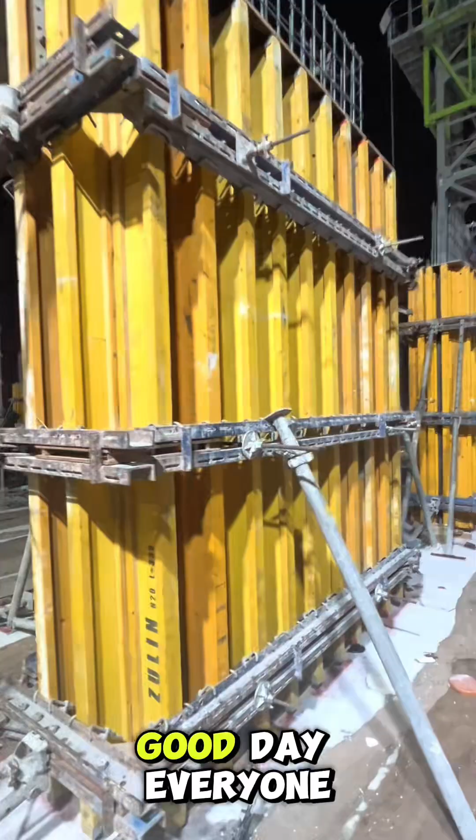If you close your column formwork without checking this, you're risking a major site mistake. Good day everyone, here are the things you need to check as a QAQC inspector or as a site engineer before closing the shuttering or formwork of a column or shear wall.

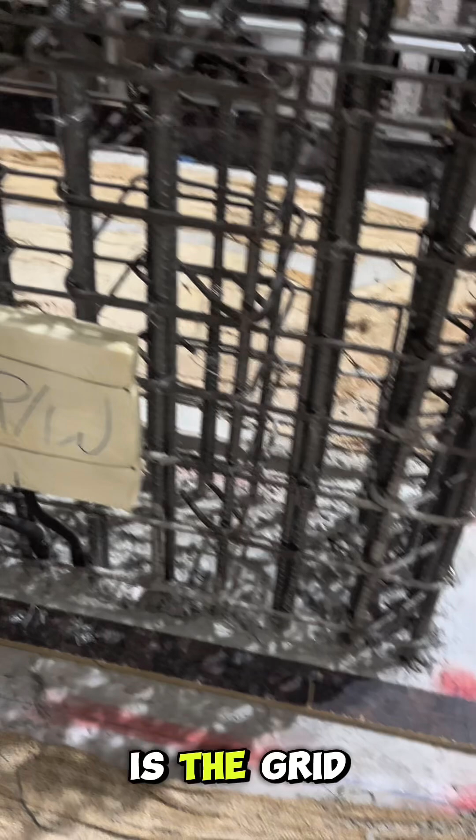First thing you need to check is the grid line or surveyor markings. In our project, our allotted markings are 20 cm from the actual column, wherein our concrete cover is 4 cm. So from the links, it should be 24 cm.

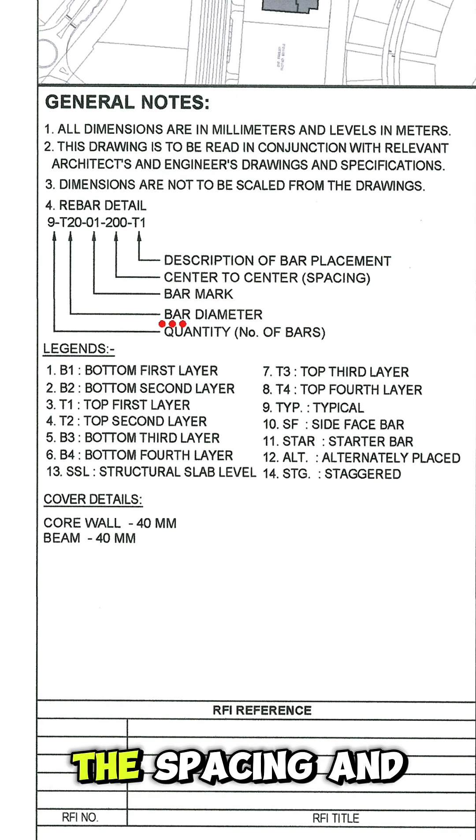Next, we'll move on to the checking of the reinforcements for the columns and shear walls. Let's start with this column right here, the CA2 column. As QAQC inspector, our first step is always to verify the shop drawings. We need to check the specifications including the diameter of the bars, the spacing, and the type of steel required.

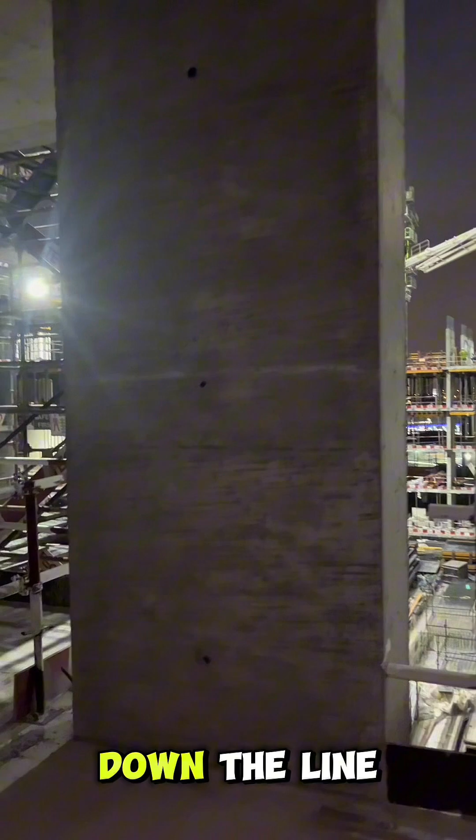So for this CA2 column, let's pull up the drawing and confirm if the actual site installation matches what's required. This ensures the column will perform structurally as designed and helps us avoid any potential quality or safety issues down the line. So first, let's check the splicing length of the column reinforcement based on the approved drawing.

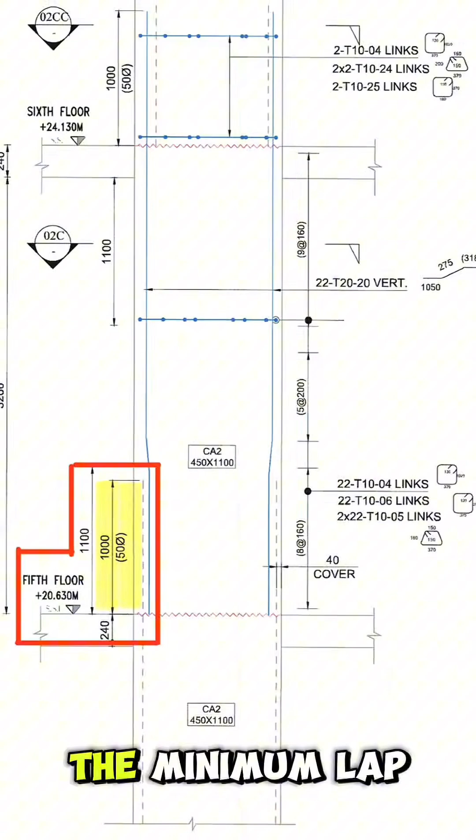According to the detail, the required lap splice is 50 times the bar diameter. In this case, we are using T20 bars, so we calculate 20 mm times 50 equals 1000 mm or 1 meter. This means the minimum lap length should be 1000 mm or 1 meter.

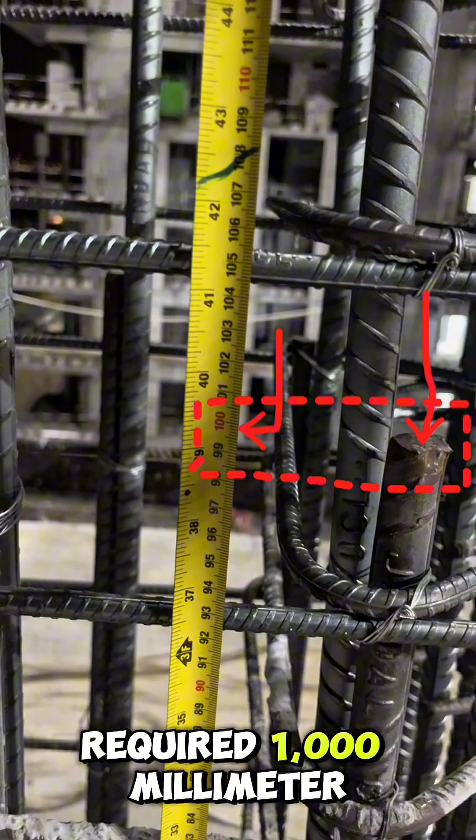Now we have verified the actual splice length on site, and it measures 1 meter, which is the required 1000 mm. That means the splicing provided here is acceptable and complies with both the drawing and standard requirements. We are doing this splice because we are currently at the 5th floor level of the building and the column has future bars extending upward. These bars will be spliced with the next vertical reinforcement once the next floor is cast.

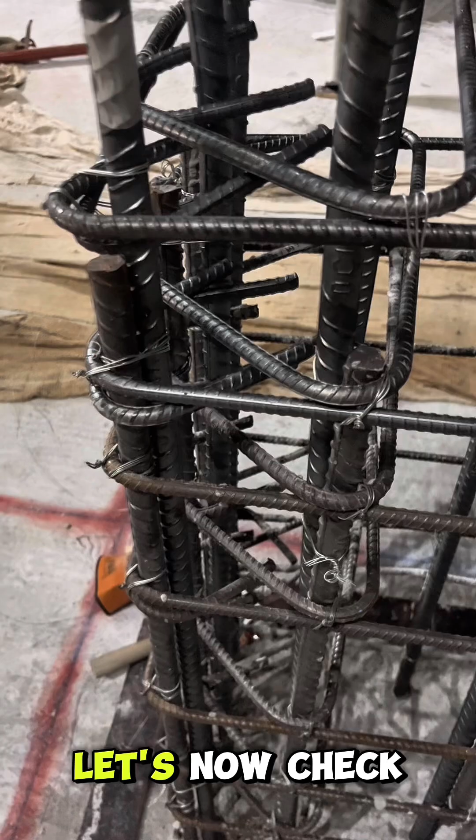Let's now check the vertical reinforcement. In the lower floors, the bars used are T25. But here on the upper floors, it's reduced to T20. This is normal because lower floors carry more load, so they need bigger bars. As the load decreases on higher levels, smaller bars like T20 are sufficient.

Next, we verified the quantity. On site, we inspected and found 20 vertical T20 bars. The drawing, however, shows 22 bars, which appears to be a typographical error. To confirm this, we cross-checked with other similar column details and they consistently show 20 bars. We recommend raising an RFI or request for information to verify and document this officially. So, always double-check both bar size and quantity before casting to ensure compliance with structural requirements.

Next, we check the spacing of the links. As per the approved drawing, the spacing is 160 mm near the top and bottom, close to the structural slab level or the SSL, and transitions to 200 mm at the midspan of the column. This is because it helps resist higher shear and confinement forces, while wider spacing at midspan is sufficient due to lower stress in that area.

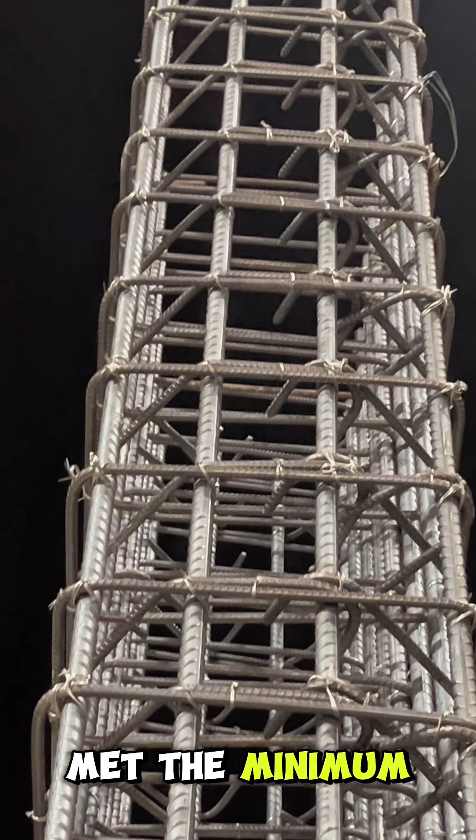Please take note also that it is acceptable if the spacing for the links is lower than in the approved drawing, but please do verify that it still meets the minimum spacing as per the design. We also verified the type of lateral ties used, whether they are single or with cross ties as shown in the drawing.

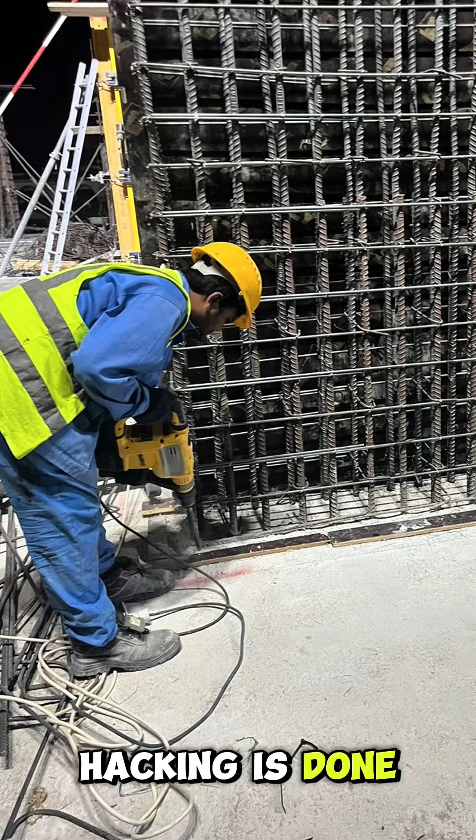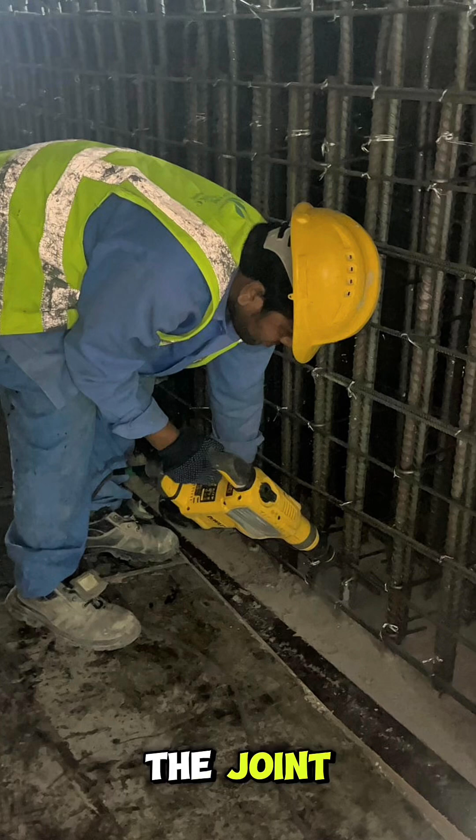We need to make sure proper hacking is done on the surface of the structural slab level to ensure a good bond between the old concrete and the new column or shear wall. This roughens the surface and improves the mechanical connection of the joint. No hacking, no bonding, and that can lead to future structural issues.

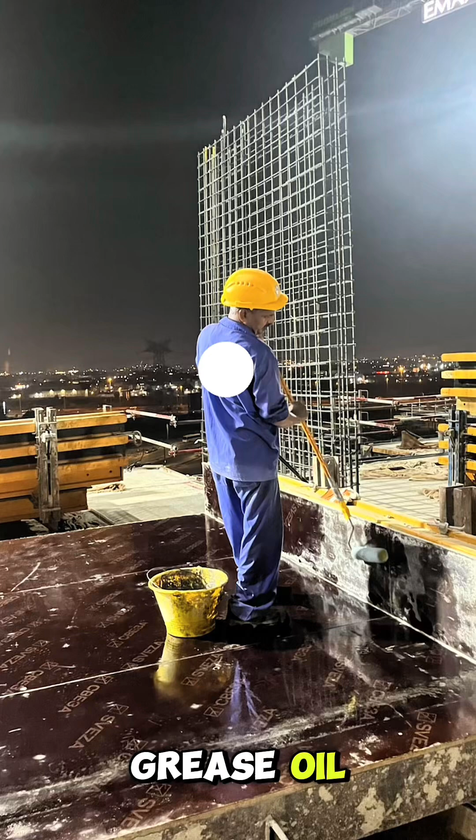Next is applying a releasing agent or sometimes grease oil to the inner face of the formwork or shuttering. This prevents the concrete from sticking to the plywood or formwork, making removal easier and helps avoid damage to the surface of the newly cast column.

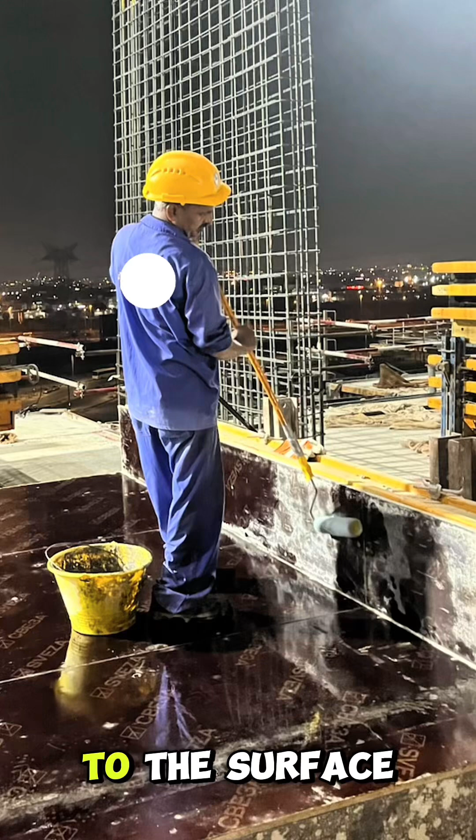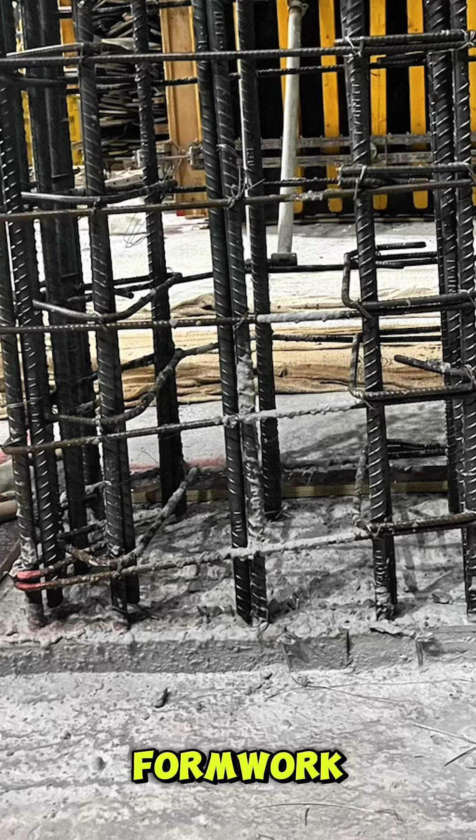So finally, there are just a few minor issues that I have observed in this checking of reinforcement. Some links are slightly swayed or misaligned as you can see, and I have already instructed the foreman to realign them properly and clean the reinforcement before closing the formwork. So that's all on how I check the reinforcement of our columns in our project.

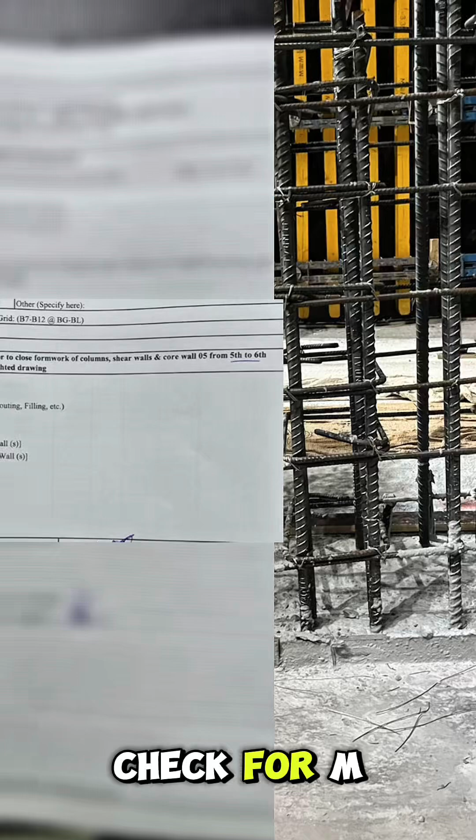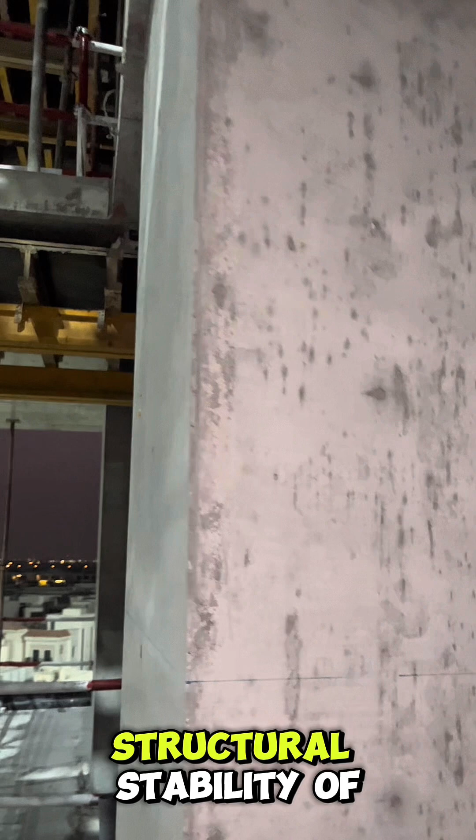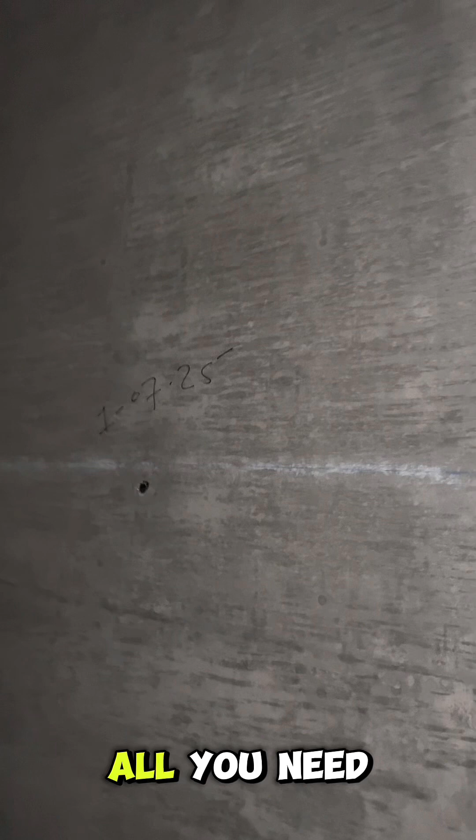Lastly, before closing the column formwork, we need to check for MEP clearance. This is very important because missing MEP clearances often lead to drilling or cutting through hardened concrete, which can weaken the column and compromise its structural stability. Ensuring proper clearance before casting helps avoid future issues and keeps the structure safe and clean. So that is all you need to consider before closing the formwork or shuttering of columns on site.